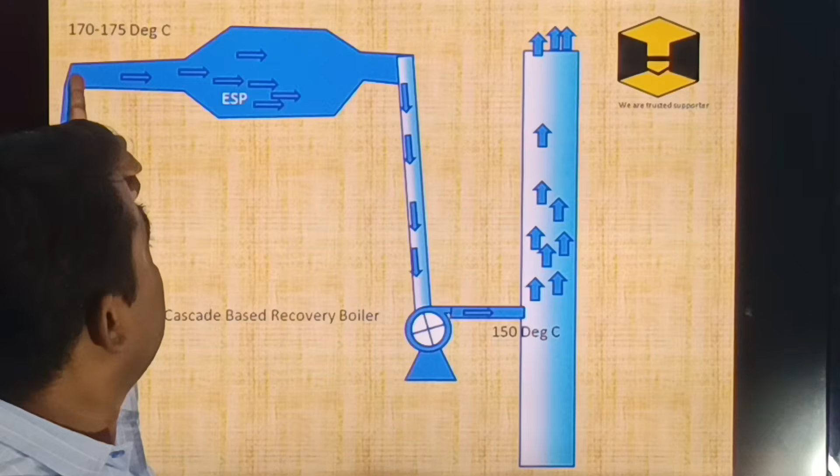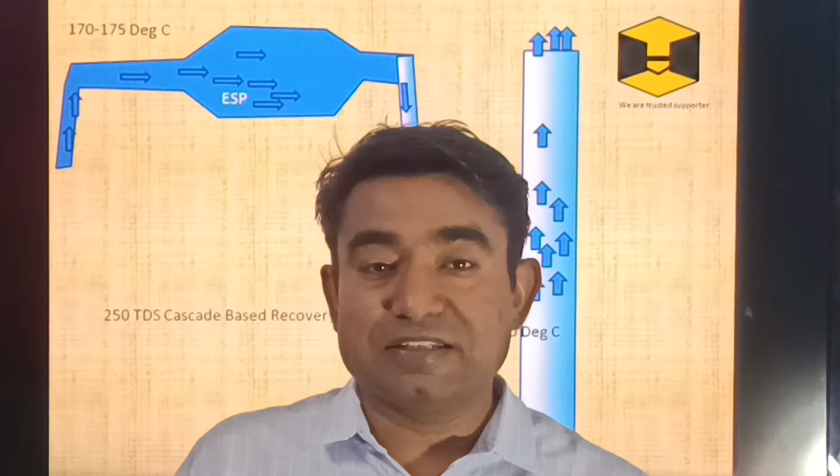So, behind me, if you see, flue gas of temperature 170 to 175 degrees is going through the ID fan to the chimney. In such type of system with cascade evaporator, basically two types of energy losses are there. One is hot vapors of 170 degree centigrade, which is equivalent to LP steam. Another loss is hot dry air which is going as a flue gas.

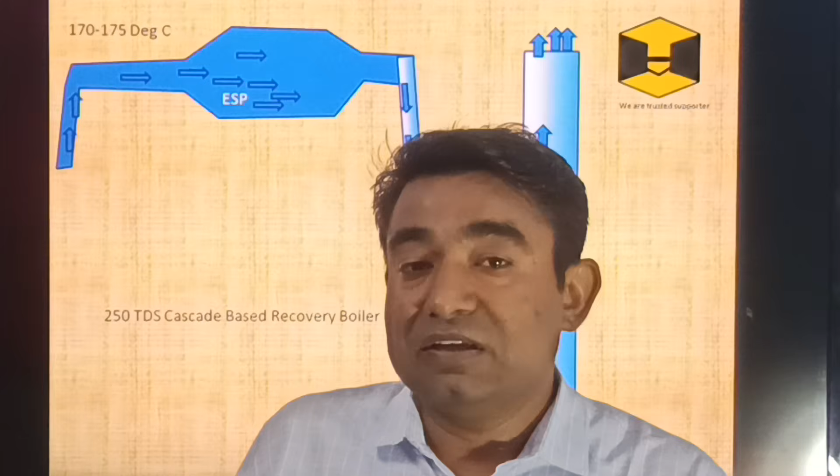As typically it has been seen, total steam requirement to heat up such air is usually 3 tons per hour. It means 72 tons per day steam is lost to heat up the air from 35 degree to 175 degree centigrade. So here is the mass balance and economics related to it.

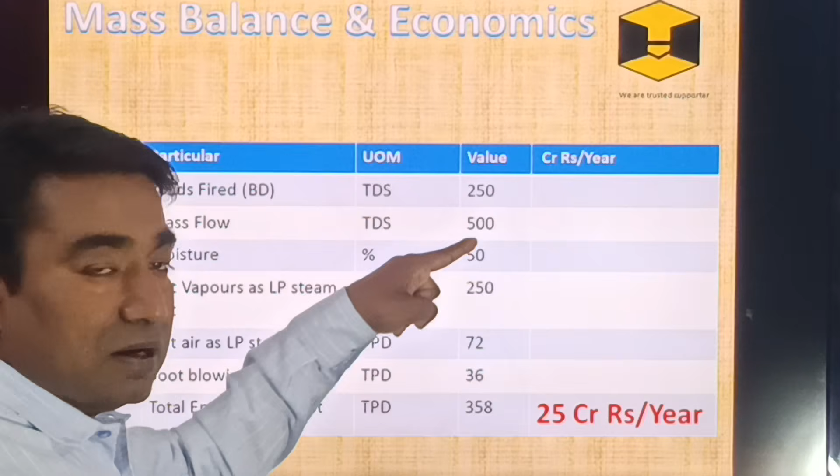Solids fired per day as bone dry is 250 TDS, but because cascade evaporator increases the solid concentration from 50% to 60% by the exchange of energy, total mass fed into the cascade is 500 TDS per day. If you minus the dry solids, you will find that 250 tons per day of hot water or vapors is removed from the recovery boiler. This vapor is equivalent to LP steam at prevailing temperature.

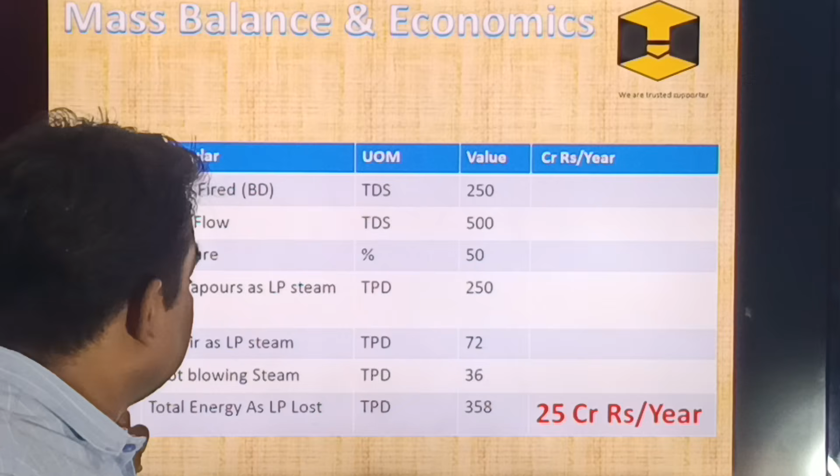Also, total hot air required in the cascade is 72 tons per day and soot blowing losses are 36 tons per day. So combined, total hot water vapors as energy lost is 358 tons per day, which can be said as 25 crore rupees per annum. This amount is huge. It is so high that you can purchase a new recovery boiler every 4 years. So energy potential is huge.

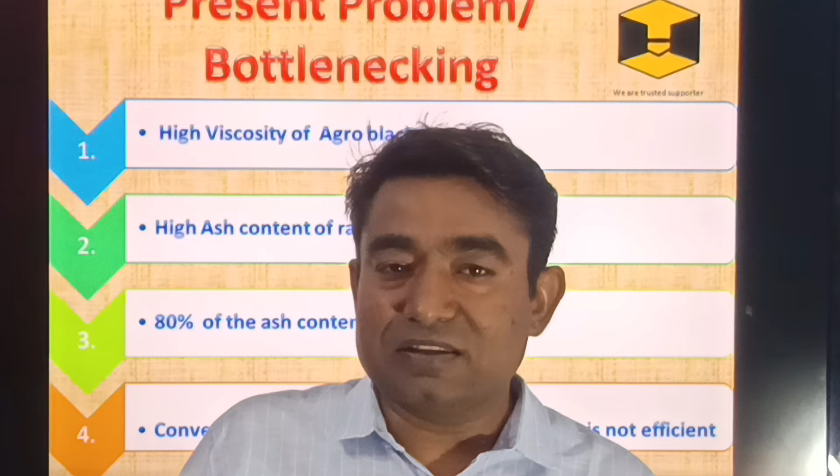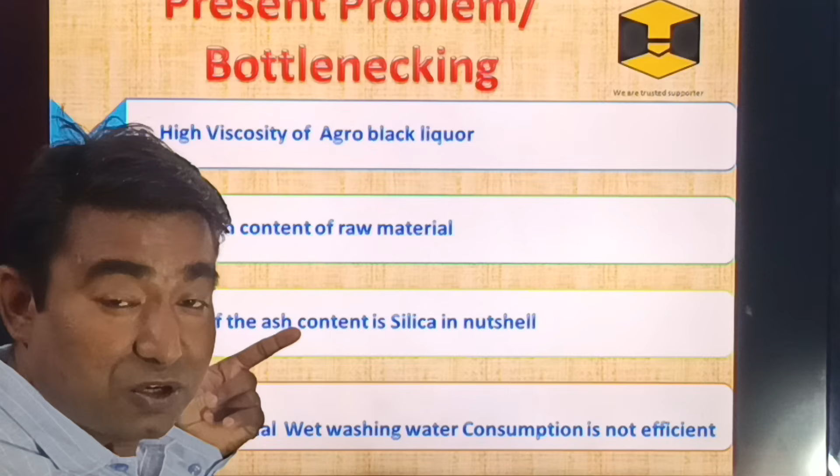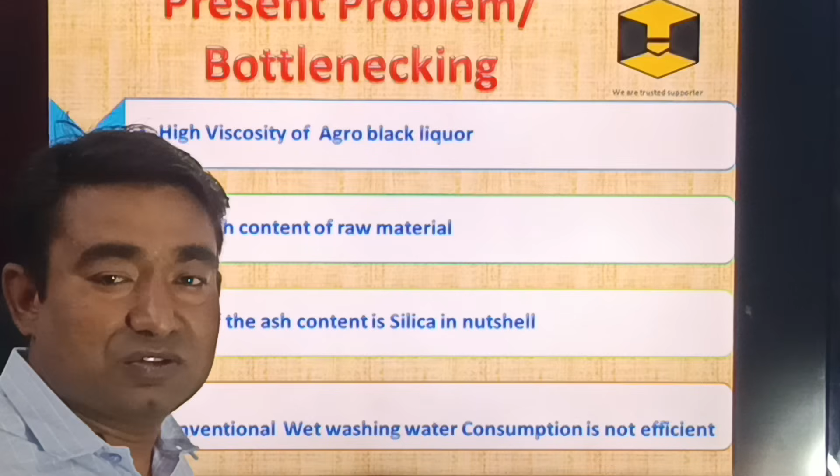So what is the bottleneck and the problem? What has to be fixed actually? Why is it happening? Cascade type of evaporator is usually used for agro based processing where the black liquor has high viscosity. So the first bottleneck is high viscosity of the black liquor, due to high ash content of the raw material. Of this ash content almost 70 to 80% is silica. If silica is reduced, viscosity will also get reduced substantially. Conventional wet washing system is not able to leach out or remove this non-process element substantially.

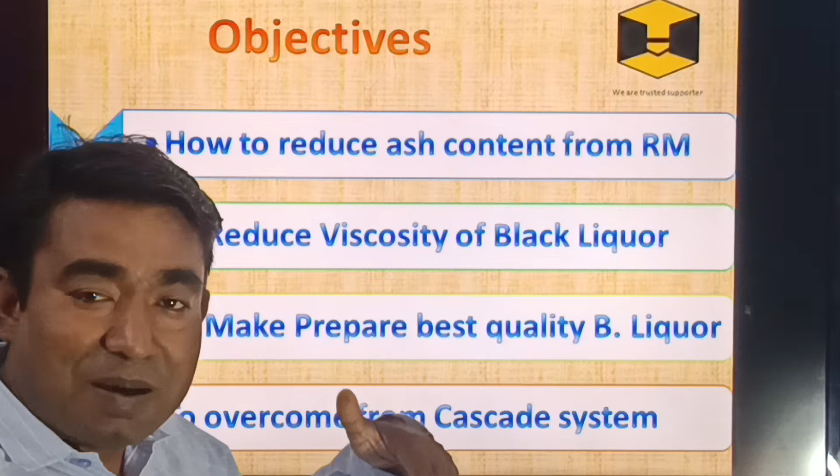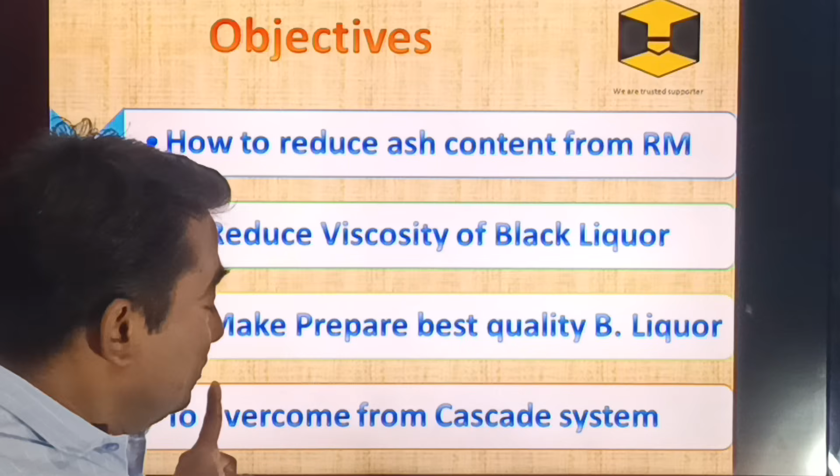So what are the objectives of this study? The objective is to reduce the ash content from the raw material yard itself. Another important aspect is to reduce the viscosity of the black liquor and improve the quality of the pulp so produced. Also to produce best quality black liquor, to overcome the cascade evaporation system, because cascade takes away most of the energy from the recovery boiler to the chimney. So we have to overcome that.

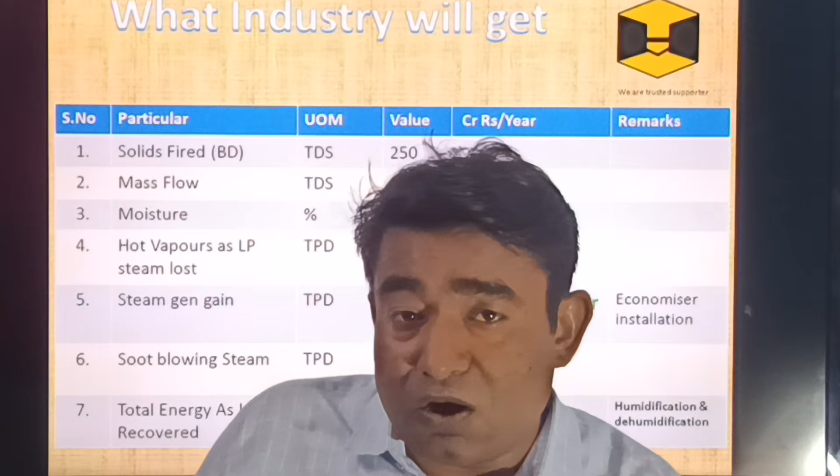So you will find that the reason for the high viscosity black liquor is leached out from the raw material itself before pulping. So what will industry gain after implementation of this patented technology?

Industry will gain high steam generation ratio. If the specific steam generation, running with the cascade, was 2.5, it will increase to 3.5. Means almost 250 tons excess steam will be generated. Definitely some modification, as well as cascade removal and economizer addition, is required. This activity will yield 17.5 crore rupees in terms of energy.

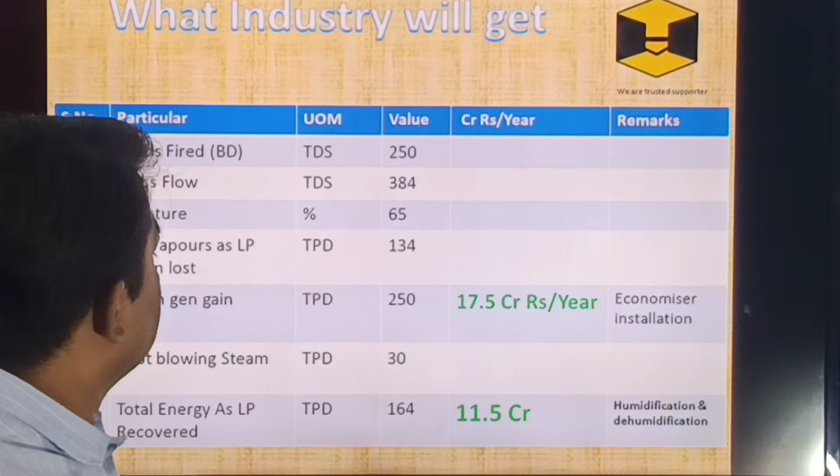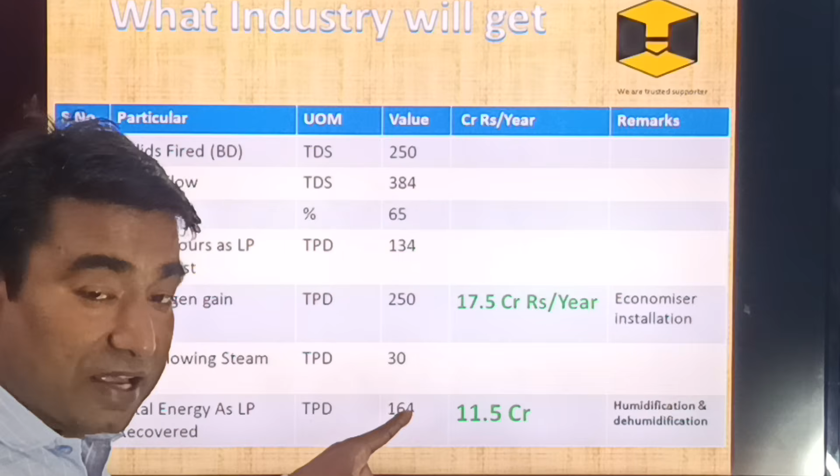Another gain will be to utilize the heat losses from the hot flue gases, because if we are able to increase the solid concentration up to 65%, the moisture will reduce from 250 tons per day earlier to 134 tons, and soot blowing frequency is also expected to get reduced. So energy as LP total will be 164. Still this energy can be captured by a humidification and dehumidification system.

So friends, this was the system by which we can capture most of the heat loss as well as reduce the coal consumption.